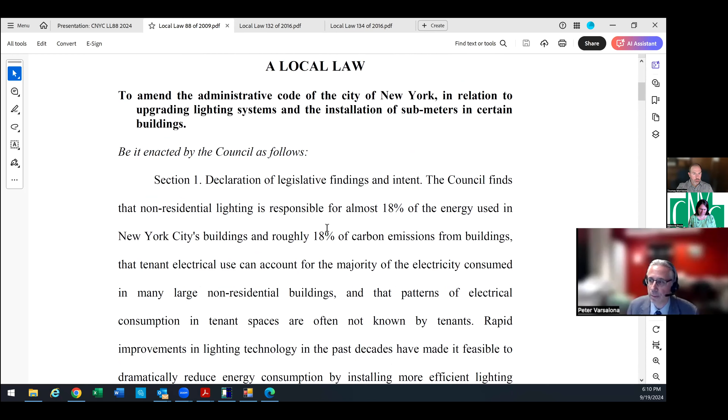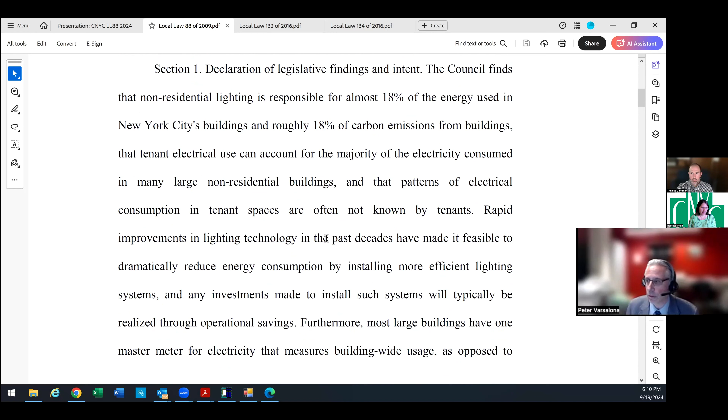Alright, so Local 88 was instituted, as I said, in 2009. So it covered basically, and the reason why I wanted to bring it up is what was the intent of it, right? The council found that non-residential lighting was responsible for about 18% of the energy used in New York City buildings and roughly 18% of carbon emissions from buildings. So back in 2009, they were very concerned about lighting systems. Their focus was in many large non-residential buildings, but nevertheless, it was still something that would cover residential buildings, had to be considered.

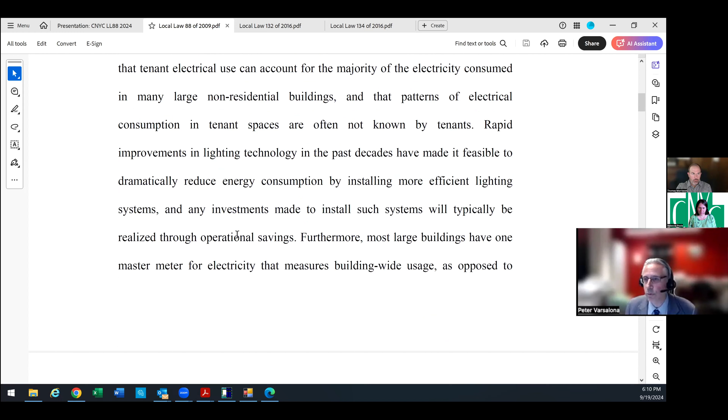It covered 50,000 square foot buildings that had to comply with Local Law 87, because remember this was part of the 84 to 87 individual local laws, right? 84 is the annual benchmarking, 87 is the 10-year energy audit retro commissioning plans, 88 is lighting and submetering. Again, issued in 2009, it said you had to comply by January 1 of 2025. So again, many owners weren't focused on it.

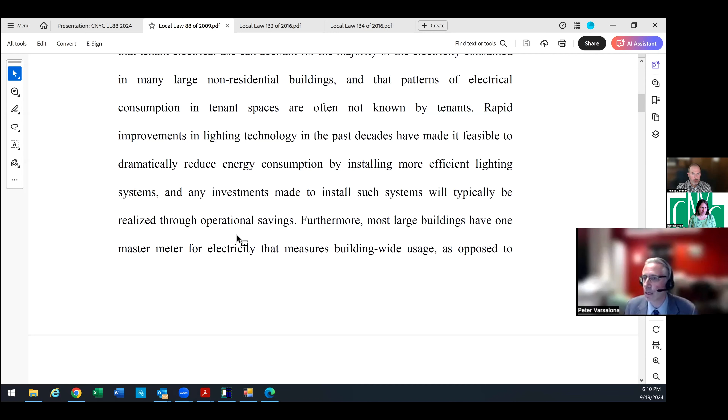A couple of big exclusions were residential units. So again, residential homeowners, cooperators weren't really that concerned about it at that time. And one of the other parts of it is commercial tenants. You had to be a pretty large tenant, right? It had to be 10,000 square feet.

It basically modified Article 310, the required upgrade of lighting systems. Article 310 is actually in the maintenance code, maintenance of buildings section of the code. It's chapter 3, and it went over it. All these latest round of local laws where you're required to do things like gas piping inspections and things of that nature are located in this section of the code.

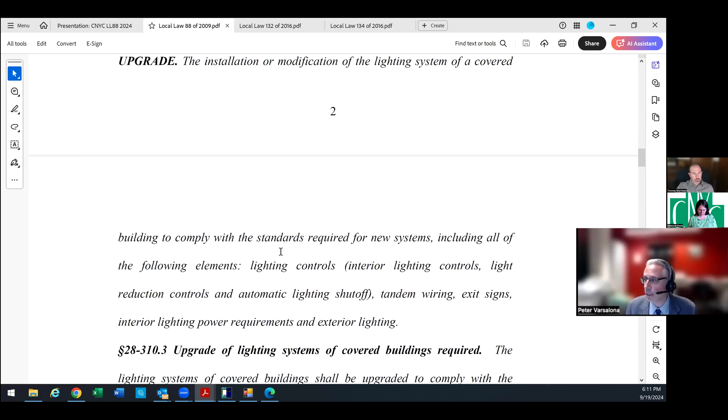Now, at the time, covered buildings meant 50,000 square feet, and the definition of upgrade was lighting system of a covered building. But if you notice, it always said lighting controls, right? And I think that's what confused a lot of owners, right?

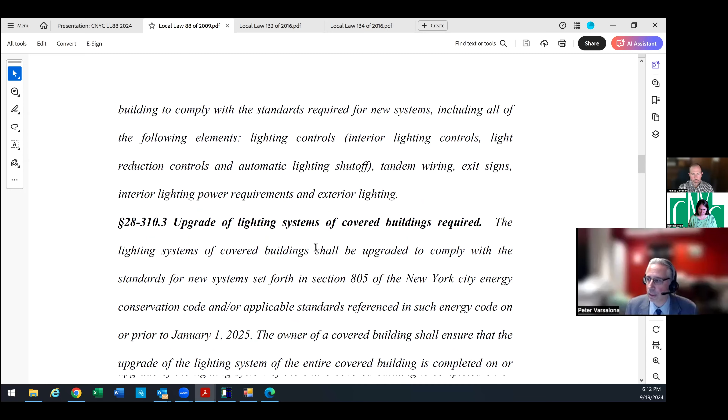A lot of owners don't realize it. Over time, just by virtue of complying with Local 87, low-hanging fruit type upgrade items, lighting replacements with LEDs, were often done, and many buildings have already done that. But they missed this part of it, right? They weren't focused on the lighting controls, which we'll talk a little bit about this evening. I'm going to stop the share on that.

Okay, and then I'm going to share another local law.

This is 132 of 2016. Now, this one talks specifically about the sub-meters. For whatever reason, the City Council in its infinite wisdom decided to break the 2016 update into two, 132 and 134.

132 focused on the sub-metering of tenant spaces, and 134 on the lighting. The main issue is that the definition of a covered building changed, lowering it to any building over 25,000 square feet. Local Law 97, which Tom will be talking about, also covers buildings over 25,000 square feet. Benchmarking also changed to 25,000.

Same thing happened here, again in 2016, lowering the covered building size to 25,000. This made more buildings now have to comply with the lighting and sub-metering requirements of Local Law 88.

It always had the same exceptions. In this case, residential units, meaning dwelling units, are not included. Of course, if you're in a multiple dwelling with retail and commercial spaces, those have to comply. Non-occupiable or residential spaces within a multiple dwelling, like storage rooms, boiler rooms, and fire stairs, all had to comply. It's just that the work inside dwelling units was excluded.

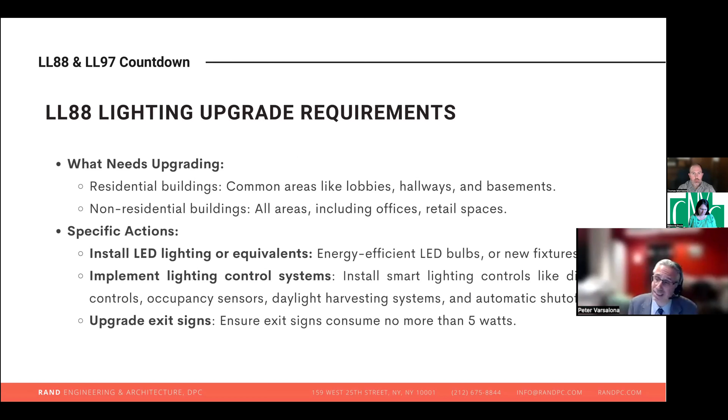Who must comply? Again, now for sub-metering, but non-residential spaces greater than 5,000 square feet.

Individual or shared sub-meters could comply. Monthly statements have to be sent to those tenants that show their energy usage. Most of our buildings that we find are sub-metered. You do find occasionally group medical facilities with multiple tenants that require sub-metering that may be shared on a common meter, or perhaps a sponsor that still owns a large section of the commercial condo section, or other areas that are on a common meter that now have to be separated out. If you're a co-op that owns those spaces, you have to make sure these areas have sub-meters for each tenant space, and that they have lighting that's in compliance.

If you haven't done so already and you're behind the times, you've got to inspect these areas right now. These can be inspected, at least initially, by your superintendent or manager, just to get a sense of where you stand if you don't know. You're probably already sub-metered, but the lighting you really need to check and see where you stand.

There's probably a variance of lights that have been upgraded. Some may just simply have had the light bulbs changed. I suspect that if you haven't done lighting controls, which is the majority of the buildings that we cover, they just didn't do that, and now they're trying to race to catch up to comply.

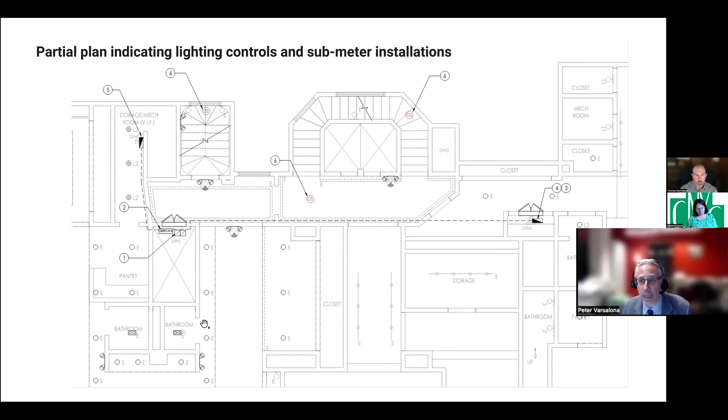On this particular plan, this is a building where not only did we have to provide sub-meters, we tend to specify Quad Logic — there are many different types of meters. For this particular tenant, we put a sub-meter onto their panel. We have wireways that go to different equipment, and we have occupancy sensors that control lights in each different section. So there's a fair amount of work here to get into compliance.

So the work has to be done by December 31st of this year. The report has to be filed by May 1 of next year.

This is new, right? So we don't even know — let's say you finish the work in February, is the DOB going to catch you and issue a violation because you didn't do the work by December 31st? No one knows. We understand they're going to get the report from the licensed design professional or an electrician — the regulation does allow electricians to file these reports by May 1 — that will indicate compliance or not. And that may be, if you don't comply, when you get a violation. That's what we expect.

Could an inspector go to your building and say, hey, you haven't done this work by this date? It could happen, but I just don't think the city is prepared to send a fleet of inspectors on January 1st to see if you haven't fully complied. I think they're going to look for you to submit those reports. They want the work done. Whenever I've gone to city meetings, they always talk about their focus really being on getting compliance, not so much fines.

So I don't think — I mean, Local Law 88 is a one-time deal, right? It's not annual, it's a one-time filing. They want you to comply with the regulation. Obviously, if you haven't complied by now, you're behind the boat.

You didn't start 15 years ago or 9 years ago, depending on when you had to actually comply, so you're under the gun a little bit.

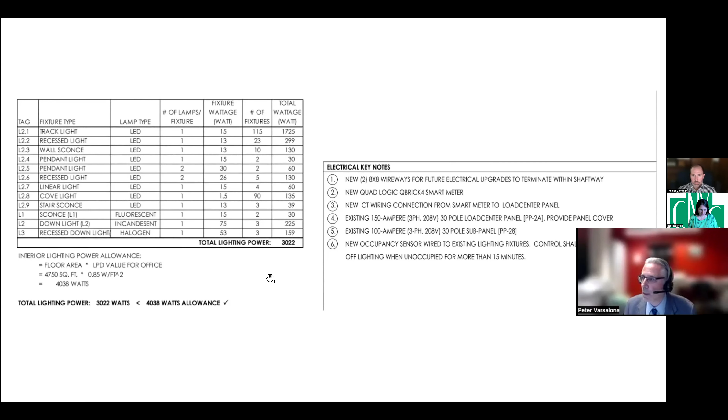A lot of times it's just changing out bulbs, getting rid of your fluorescents, putting in LEDs, getting conversion kits. But there are times when you have lights that just aren't conducive to LEDs, and you're going to have to switch them out, meaning put in a new fixture. Some of the older lights are not conducive to dimming controls, and if they're non-dimmable, you have no choice - you have to switch them out, and that could be an unexpected charge you weren't planning for.

So what are some of the penalties for non-compliance? There are always penalties with New York City and their local laws. If you don't submit a lighting upgrade compliance report, it's $1,500 for each year you haven't submitted it, plus a report for the installation of sub-meters. Why two reports? Because we think there will be two reports filed, one for lighting and one for sub-meters, coinciding with the two different local laws issued in 2016. DOB might change it and have one single report - we don't have a form yet, so we don't know. I'm sure DOB will eventually provide a form to submit with any other required documentation. There's also $1,500 a year with an additional penalty of $500 per tenant space for failure to install sub-meters.

The key is you've got to get your compliance check-in well in advance of January 1. Well, we're already September 19th, so we're not quite well in advance anymore. But the hope is you'll move forward as quickly as you can in determining your requirements. Many owners have already done work - they have sub-meters, lights on LEDs - but they may not have the lighting control aspects done, and that's something you'll need to check.

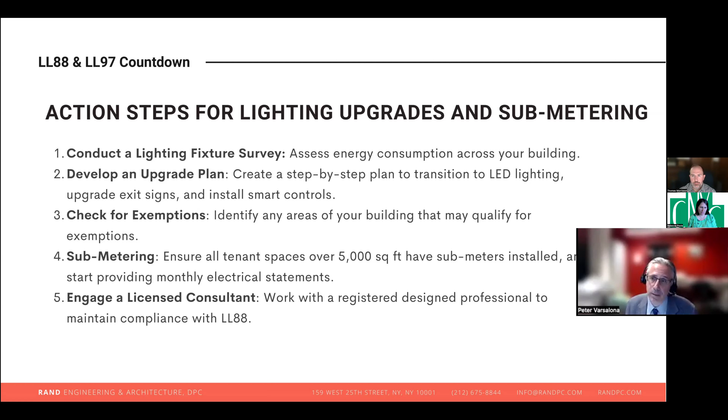We mentioned some of the exemptions already - dwelling units, and some other lighting elements that may have been upgraded post-2010. Those types of things are in effect, and it's certainly helpful not having apartments included in the upgrading program.

Submeter exemptions apply to small buildings that are not more than 3 stories tall. Again, these are all in the actual regulation itself.

What are some of the occupancy sensors? Some are passive infrared type. These detect changes in temperature in a room, so the sensor knows when to turn the lights on.

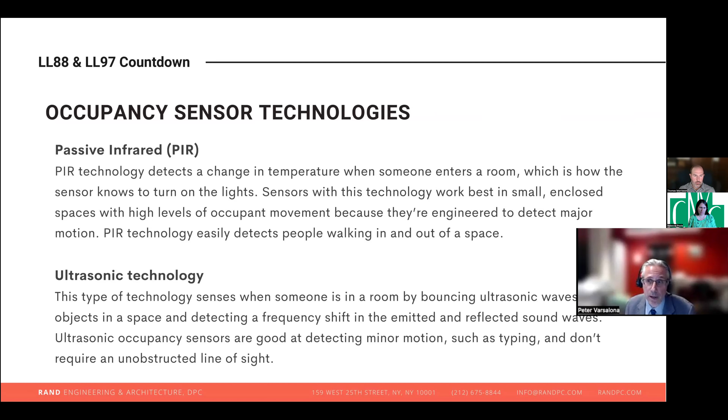Ultrasonic type sense when someone is actually in the room. It bounces waves off and sees if it detects any kind of frequency shift, and that is good at detecting minor motion. So those can be pretty accurate.

Dual technology type uses both. Both technologies within a sensor must detect someone in the room in order to turn on the lights, but one must continually sense in order for the lights to stay on. So they're a much more sophisticated way to determine occupancy.

These technologies are suited for different types of use and different types of motion expected in spaces. So all 3 are good for major motion, someone actually walking within a space. For minor motion, you tend to be better using an ultrasonic or dual. For fine motion, like turning a page, you want to use an ultrasonic or dual. And then, of course, for very fine motion, it gets to be somewhat difficult.

I know even in my office where we may have people on a floor that are really quiet, lights suddenly shut down after 15 minutes, and they got to stand up and it turns back on again. So sometimes the sensitivity has to be adjusted. You got to be careful with very fine motion.

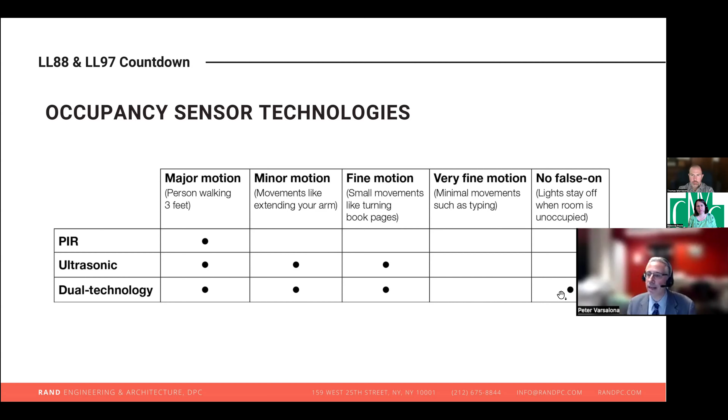And then, of course, the lights stay off when the room is unoccupied. Again, dual technology is very good for that purpose.

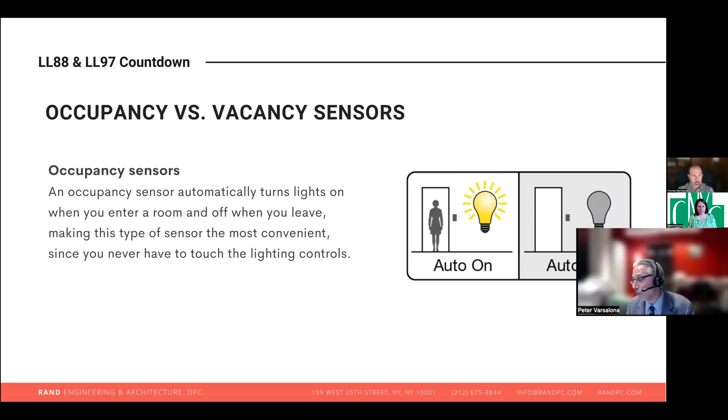Occupancy versus vacancy sensors. Occupancy sensors automatically turn the lights on when you enter a room and off when you leave. So it's very easy and convenient. You don't have to touch anything. Everything's set up, pretty basic.

Vacancy sensors also turn the lights off when you leave a room, but you need to manually turn them on when you walk into a room. Vacancy sensors maximize the energy savings from the sensor because it's not always necessary to turn the lights on when you walk into a room.

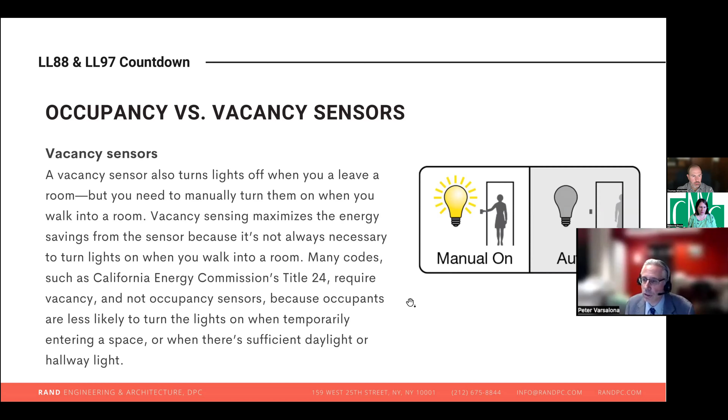So these are another type of sensor that's very effective. Some examples in commercial entities include open offices, private offices, lobbies, things of that nature. In residences, bathrooms, kitchens, laundry rooms, areas that may not be occupied very frequently.

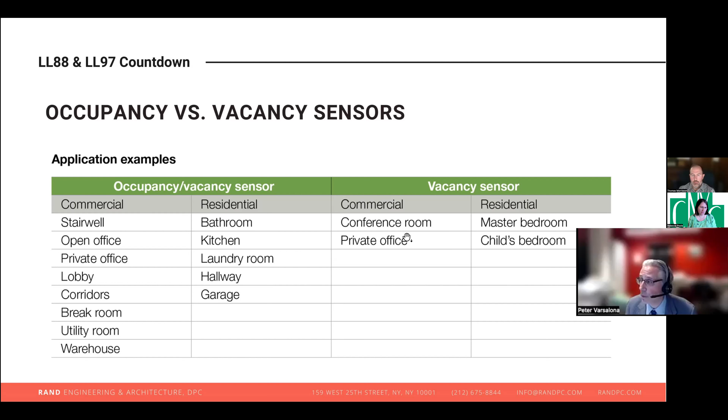Types include wall mounted and ceiling mounted. These are just some examples of what they look like, but they're very commercially available.

When you work with a registered design professional, it's one of the things we said in the course syllabus: what does that person do? They're going to be certifying the lighting upgrade and emissions compliance, which Tom will talk about in 97. And they're going to ensure that you meet the energy code requirements. Don't expect your property manager, superintendent, or even your licensed electrician to know these things. That's what the registered design professional is for, to make sure you meet all of those provisions of code.

They can also craft your RFP for bidding purposes to tailor it to the compliance requirements of your building. Steps for building owners: use clear contracts, make it clearly cut what the design professional is actually going to be doing to outline compliance, and review that scope of work and timeline.

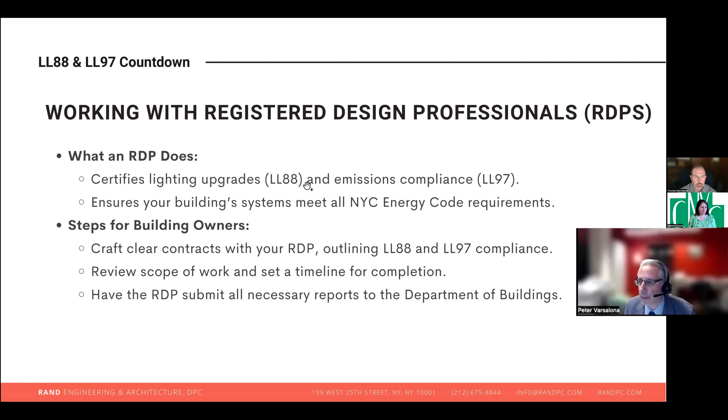You don't have a lot of time, you got to get moving on it. Make sure that the professional submits things. Sometimes contracts are written where they'll do the work but leave it to others to submit the report. I think it's good to have this design professional submit everything, to get you confirmation that everything is fully complied with.

So what are the essentials that should be in every proposal from a registered design professional? They should be reviewing the floor plans, electrical system plans, any historical upgrades that have been done, your current tenant list information, and coordinate field visits to conduct visual observations of existing lighting and electrical system conditions and configurations.

Review covered tenancy conditions at each floor to ascertain total lighting power and submetering requirements. Have them prepare a report addressing compliance review of the lighting systems and submeter installations—do we comply, do we not, and what we need to do. The report should ultimately be in a form and manner determined by DOB.

Now this is that item that's kind of an asterisk—no one really knows what that form is yet, so you really are under the gun. You got to bring a registered design professional in, but just know they're probably going to charge you for some form of report subsequent to your repair program when the DOB issues the actual form of report necessary.

The report should include all the information in the adoption of final rule dated December 14th, which is another document available online. And then, of course, it should delineate very clearly what doesn't comply and what corrective work recommendations are needed.

We see fees around, they range—I've seen some as low as $2,500. You should expect a fee range for these services somewhere in the $3,000 to $7,000 range. You can hire someone for $2,500, but it's not going to get you where you need to be.

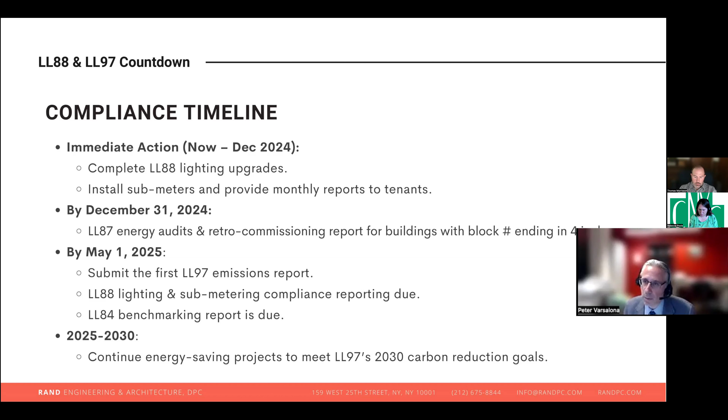And we expect a lot of owners—only about 11% of owners didn't comply with 97 in this first wave. So a lot of owners are going to be preparing for that big 2030 hit by looking at carbon reduction goals, which Tom will be focusing on.

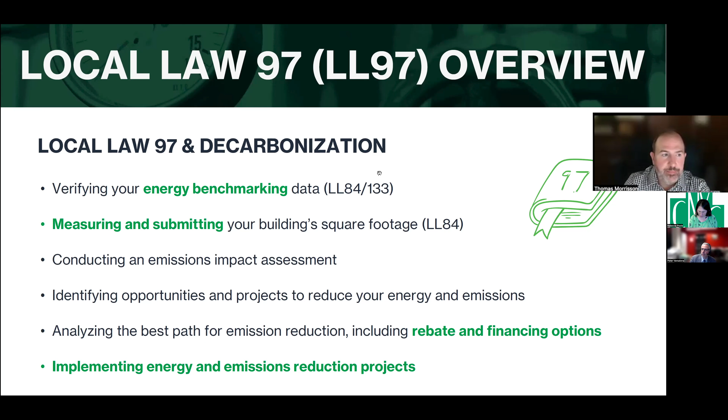This may be applicable to some or all of the folks that are on here. It may not be applicable to any of the building or any of the folks on this call, but there are alternate pathways for buildings that have 35% rent regulated, affordable housing, and income restricted properties. So those buildings are specifically called out in the law. There is a list of these buildings, which we'll get to in a sec, where you can determine if you are on that list. And there are two basic pathways.

So one is to implement what they call the prescriptive path, and so you have 13 different energy conservation measures that have to be implemented. Those actually are all really good measures that all buildings should implement.

And then the alternative is to meet the emissions limits for the 2030 to 2034 compliance cycle, which, again, the majority of buildings at their current energy usage will actually have fines during that cycle. So typically, in many cases, the prescriptive pathway, implementing those 13 measures, is going to be the easiest, cleanest, and most cost-effective way to comply if your building is subject under Section 28, Article 321.

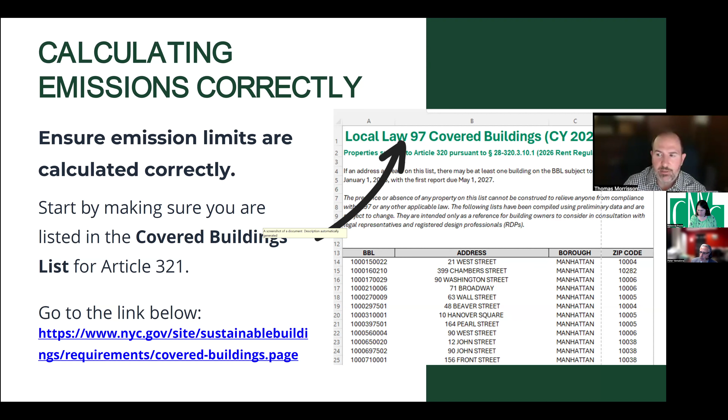So when we talk about your emissions limit, what goes into the calculation? It's really twofold: how much energy your building consumes, and carbon. Typically buildings here are using electricity, natural gas, fuel oil, and steam, and all of those sources of energy right now have carbon emissions attributed to them. So it's every kilowatt hour and therm that you use that goes into your total emissions. That's why looking at your historic benchmarking data is a good starting point to know how close you are to having potential penalties.

This year counts. The first compliance period starts in 2024, so your energy usage from January 1st of this year to December 31st will count toward your first Local Law 97 report. That report is expected to be filed on May 1st of 2025 for the previous calendar year, similar to how benchmarking has been done.

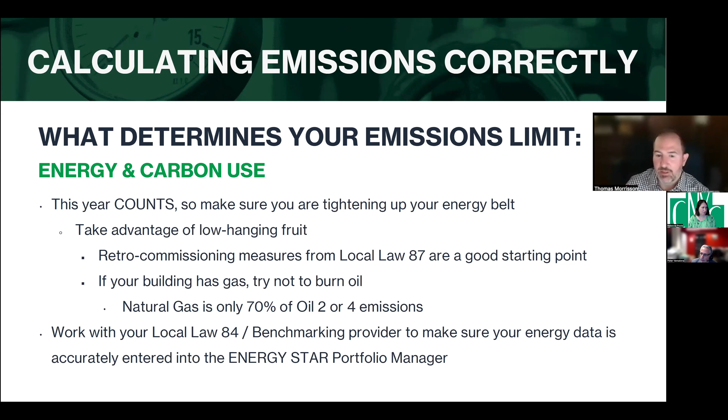So looking at that data and working with your benchmarking provider, especially when you have those lower Energy Star scores and you have a D, or you're facing high penalties, the first place to look is your data.

The other side of your emissions limits is how much energy you use and how large your building is. Local Law 97 defines gross floor area as effectively the total area inside of the exterior walls, including all area, common area, mechanical spaces, but most importantly your above and below grade area.

When we look at the DOB and DOF records, a lot of those measurements do not include some of the subterranean spaces, some of the mechanical spaces. So buildings often represent and have a lower gross floor area than what's actually within the building. That goes back to when the buildings were built, when they were filed—many buildings are 100 years old—and how the calculations were done. Oftentimes folks were submitting lower areas for tax purposes and things like that.

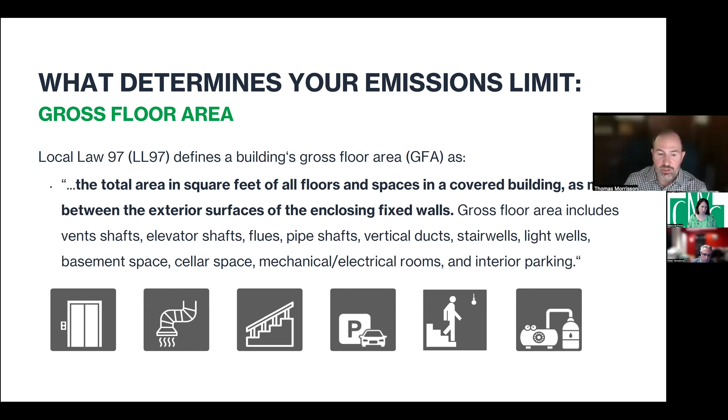It's really important to look at your floor area, because that affects how much emissions limit you're allowed to have. The more floor area you have, the more emissions you're allowed to have. Or alternatively, if you have more floor area and your energy usage is the same, your potential carbon penalties are less.

Then the other thing we note about the gross floor area is it's not always what's in the Department of Finance, since they miss, like we were saying, the basements and mechanical spaces. So it's really important to look at that.

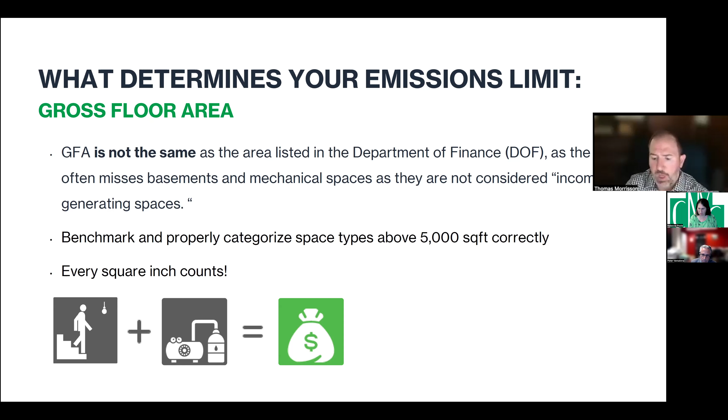We're allowed within the system to include any area of any building type or space type above 5,000 feet. Typically a lot of co-ops and condos have commercial spaces, so if you have say 10,000 feet of commercial space, 5,000 of that might be a restaurant, another 5,000 feet might be a bank or financial institution. We're allowed to include those areas separately in the filing, and each has a different emissions limit. Some areas like restaurants have a higher emissions limit per square foot than, say, a multifamily area. So it's beneficial to accurately report how much the different areas of your building contribute to your overall gross floor area.

That all leads to performing a building area measurement survey, again by a registered design professional—those are professional engineers and registered architects. What they do is go into the buildings and measure them the way Local Law 97 requires: looking at those exterior walls, including all that above and below grade space, and then looking at all of the different space types.

We have some buildings that have 20 different retail spaces, so we'll go in there and measure each space, categorize each one—a retail store, a grocery store, a laundromat, et cetera—since those all have different limits. So when we go and do that reporting for Local Law 97 compliance, we're most accurately doing that filing.

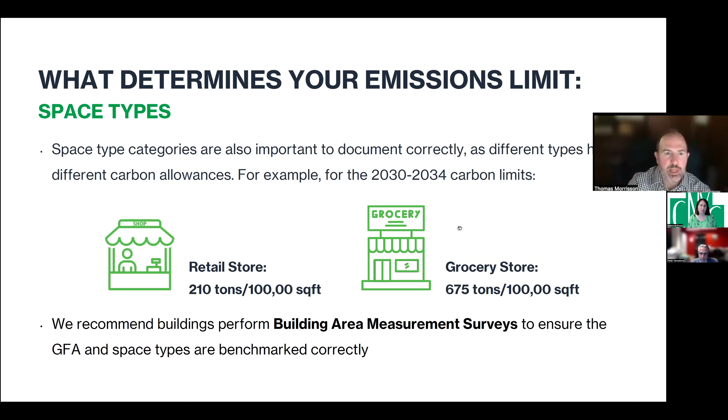So just recapping, it's really important to ensure that your emissions are calculated correctly, and that your energy and carbon usage accurately reflect what's going on within the building, making sure that it only pertains to your particular building and not some of the adjacent buildings, and ensuring you're accounting for all of your floor area and the different space types.

And then implementing your carbon emissions reduction measures where it makes sense for your buildings, whether you're on Article 320, 321 and have to implement the prescriptive energy measures, or over the next 5 years if you're looking to implement some of those identified capital improvement projects. As I mentioned, dovetailing the Local Law 87 energy audit, which is required every 10 years, with the lens of Local Law 97, so you understand the carbon impacts and how much your penalties might be reduced, is an important step.

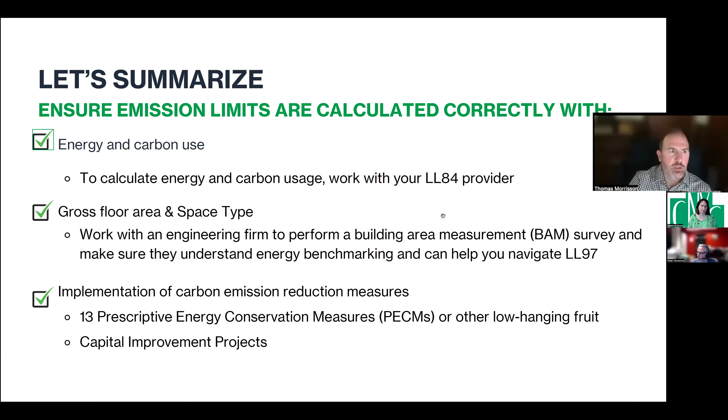And then, Article 320 - what about buildings that have penalties for the 2024 period? If you are going to be subject to penalties starting next year because your energy usage this year is likely to exceed and trigger excess carbon charges, there are some things you can do to mitigate those penalties.

Obviously, we would have to submit the emissions report by the filing deadline, and comply with Local Law 84 - that's simply your benchmarking, you're probably already there. And as Peter went through, you have to be compliant with Local Law 88, meaning all of the lighting upgrades, lighting controls, and sub-meters have been installed prior to the point of filing, ideally by the end of this year, which is what the letter of the law states.

And then you have to do one of the following: either demonstrate that certain conditions apply to the property - typically a financial hardship, which may be more difficult to prove - or the other option is having a decarbonization plan. Typically, that decarbonization plan starts with an energy audit.